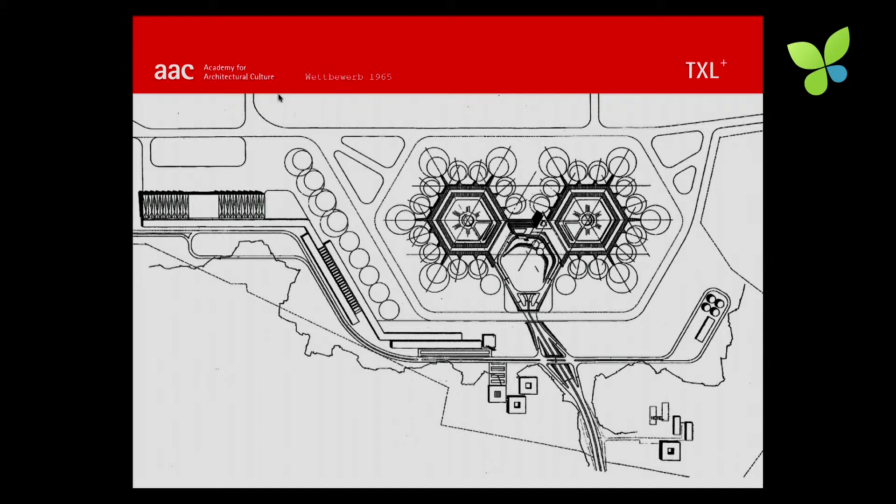So we were asked, as we also planned the new airport of Berlin, what should we do with this old building? That was the question from the city administration here in Berlin. Our idea was to build an energy plus city and to convert the terminal building into a startup center for new, innovative companies dealing with the energy problems of our world.

This is a conference where we deal with all these companies, but there's a problem in Germany: we have innovative companies everywhere, but no place where they can demonstrate their power and innovations. The idea was to have this building in the center of Berlin to gather all these powers in Germany, and then in a second step to build an energy plus city where people can live and work, where energy consumption from oil and gas is reduced to zero, and renewables support all these city structures.

The second step is that we want to create a carbon-free city district. And the third thing, which is very important, is that we want to create buildings which are completely recyclable. That's the main problem for architects and engineers in the next decades: 60% of waste all over the world is produced by buildings—by demolishing interior decorations, technical installations, and of course demolishing complete buildings. So we have to rethink our way of building houses in the future, and that's why we want to create recyclable buildings in this city.

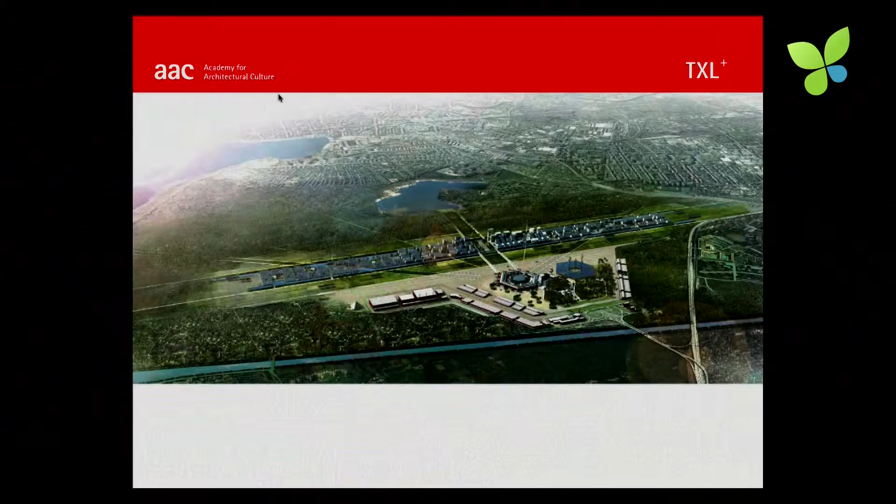If you think about the size of the airfield of Tegel, you see that we have 466 hectares. And if you compare this to Friedrichstadt with its 300 hectares, you see what kind of potential, just in terms of space, you have there.

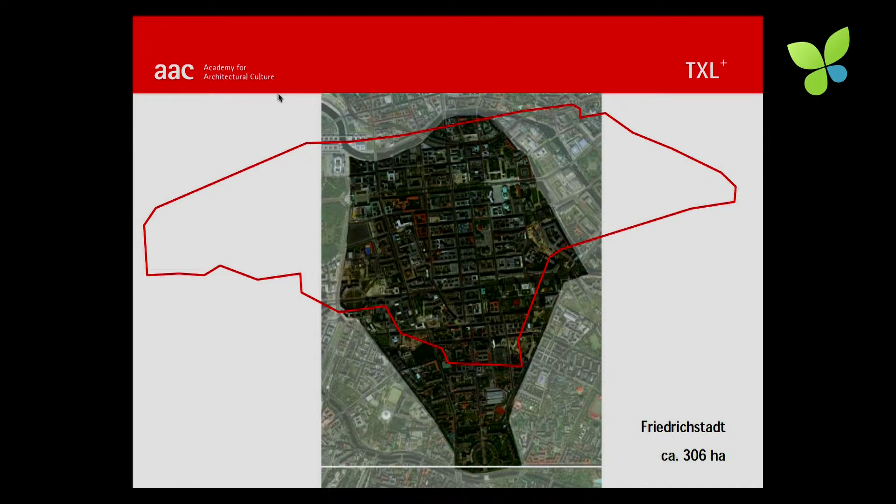This was the first sketch by Meinhard von Gerkan, more than two years ago in 2008, where he proposed to have the incubator in this terminal building, and then a geometrical relation to the airfield and the runways, with band-like city structures for living and working spaces.

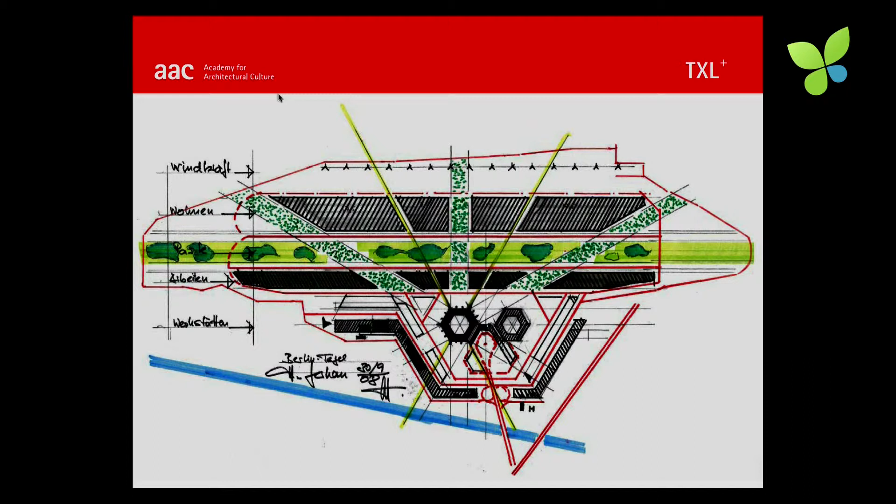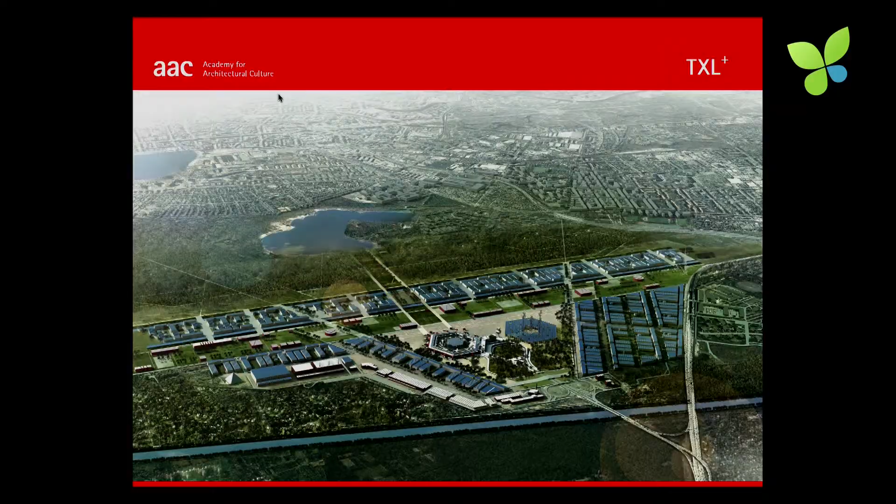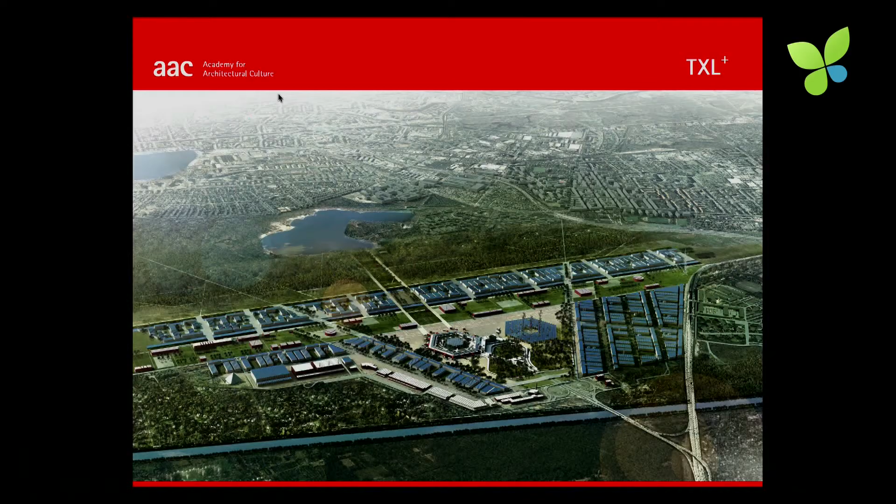The next picture shows the actual status quo of the master plan, which we developed together with the city administration, the Department of Urban Development here in Berlin. It still shows the airport and the terminal building in the center, together with a solar plant on this side—the second hexagon, which was always missing.

This second hexagon, this solar plant, together with windmills, supports the building structures—most of all the terminal building, but all the other building structures too, which have solar panels on the roof—so that we have a complete energy system reducing energy consumption from oil and gas in this city quarter.

We regret that during the process, the original idea of having residential functions together with office spaces and production in one band-like city was, for the time being, replaced by a technology park concept. But still the original concept is very clear and still visible.

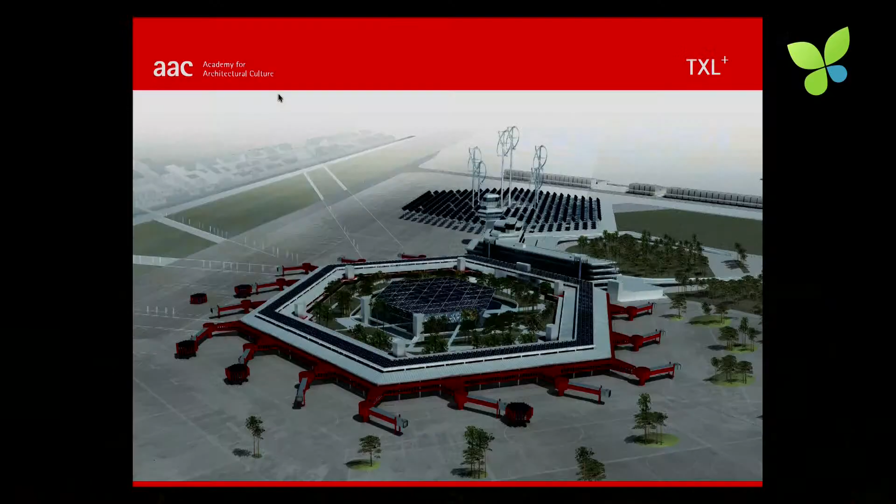Here you see a detail rendering of the terminal, this hexagon with solar panels on the roof. We want to show the change of ideas in such a way that we replace parking lots with a real green park in the center of this terminal, and on the other side you see this solar plant with windmills supporting the terminal building.

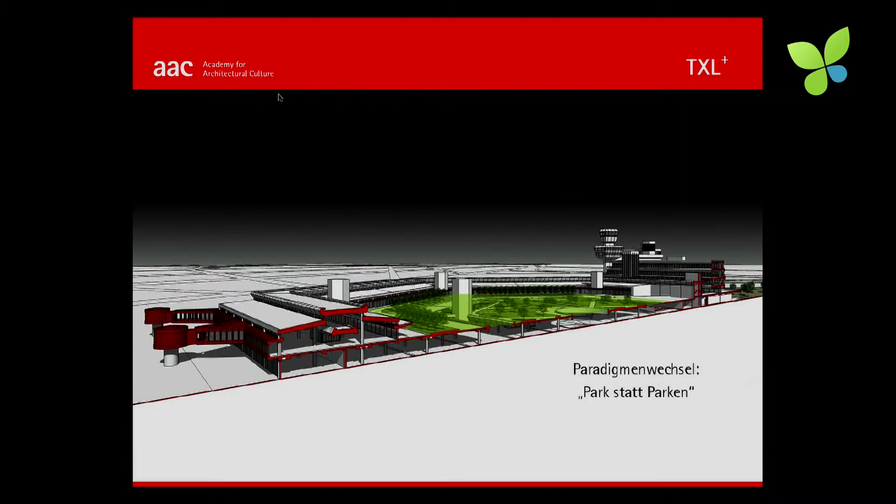In the center of our new building, we have an assembly hall where you can hold conferences and gather all these companies working and researching in this building. We want to create a circular tour through the world of green industry for delegations from all over the world.

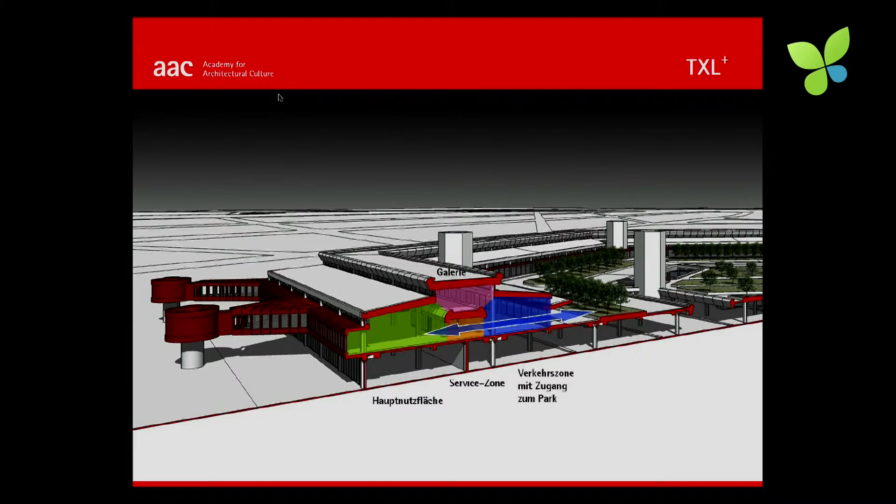The concept is about having three zones: one exhibition zone, one main functional zone, a gallery running around the building, and a circulation area open to the park. I think the most sustainable way of thinking about buildings is to keep them in use, not demolish them and produce waste, but think about a new function for such big buildings like the terminal building in Tegel.

We want to make advertisement, to show the ideas. From this summer on, we created the idea of a pavilion in the center of Tegel, where we want to display the ideas and the future of the airfield of Tegel. This idea will be realized in the beginning of July.

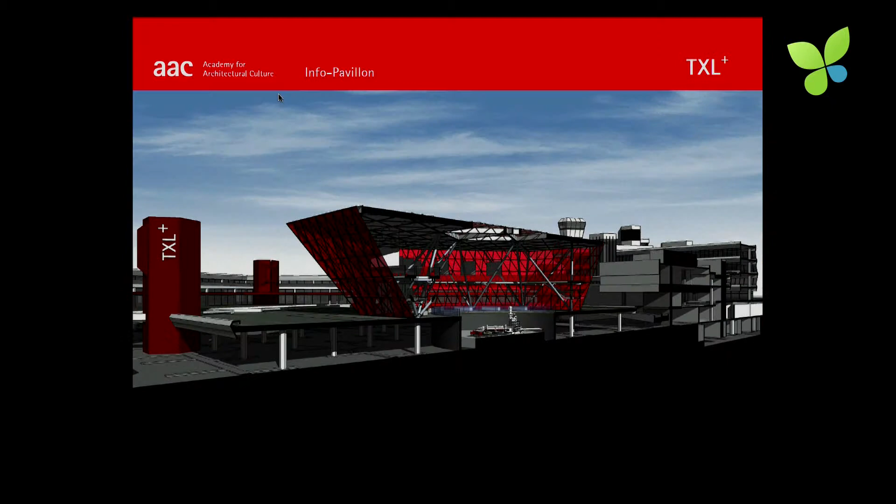This is an image of the info pavilion, which will first serve as an info pavilion for the new airport in Schönefeld, and then for the future development of the sustainable city in Tegel. Here is a section through this pavilion with a big model of the newly used terminal building and an exhibition of our ideas.

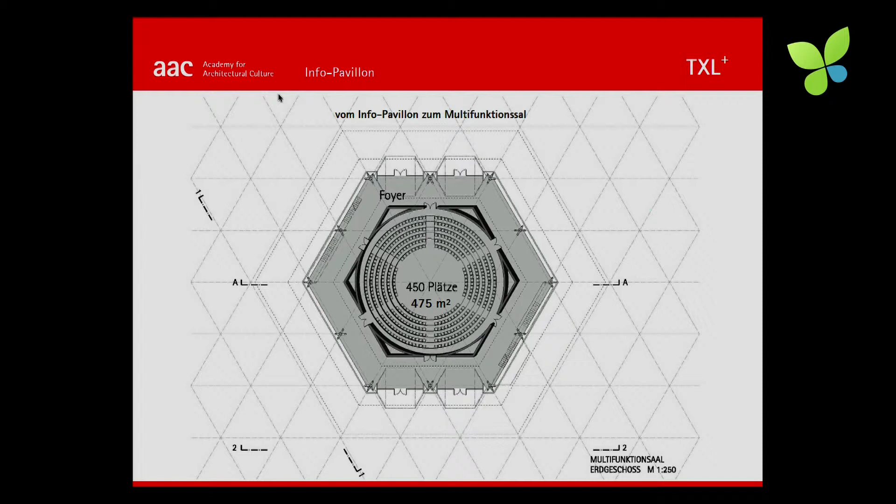Later on, this building structure could be used as an assembly hall with 450 people, and it's a very modern building. It still keeps this hexagon form, but uses solar panels and big glass facades, tilted so that the heat income is reduced to a minimum. We gather the water from the roof to run the restrooms and these kinds of things.

So this would be the first step. And then we developed four scenarios together with Jan Hess, who is not only an organizer but also contributed to our ideas. The first scenario for how to use the building is a green headquarter: we would have working spaces on the air side, a working gallery running through the whole building, and a circulation area with meeting areas on the land side.

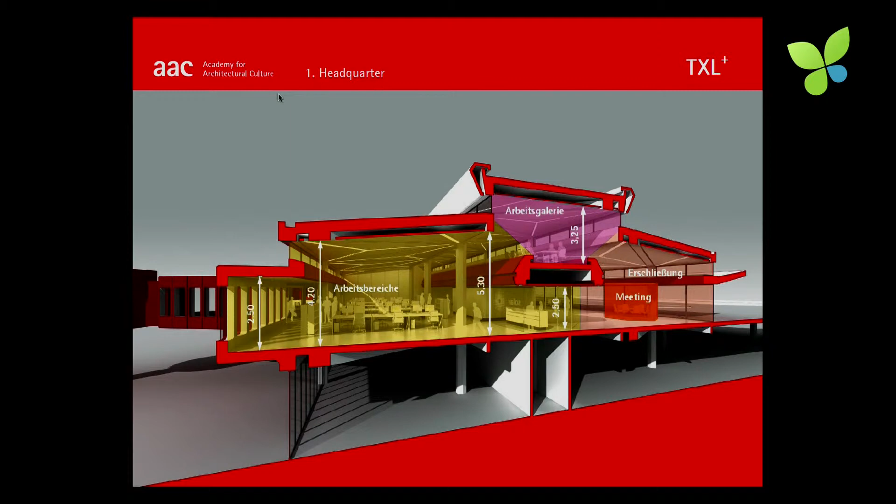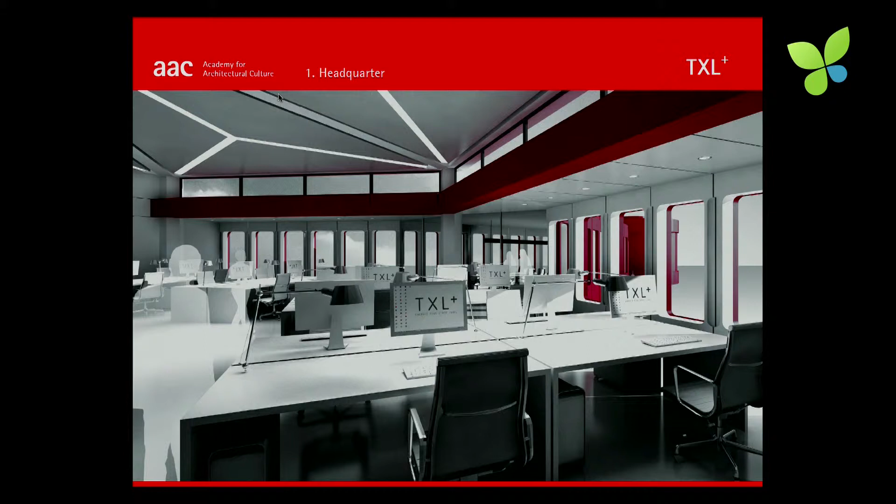If you know the building, you'll understand that we open up the check-in parts, the check-in counters, and create a connection between the air side and the land side. These spaces are nowadays used for baggage claims, but in future will be used for working and research spaces. All in all, we have 9,300 square meters just for working spaces, and these orange dots are meeting points. This is the gallery.

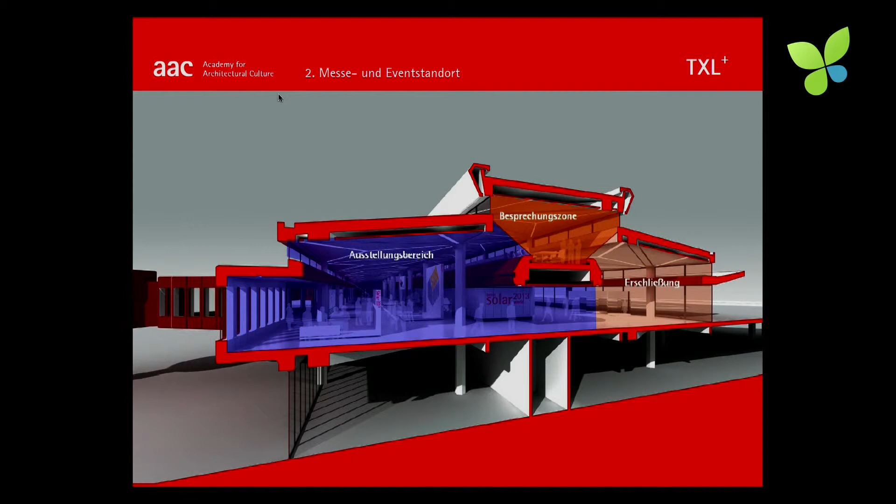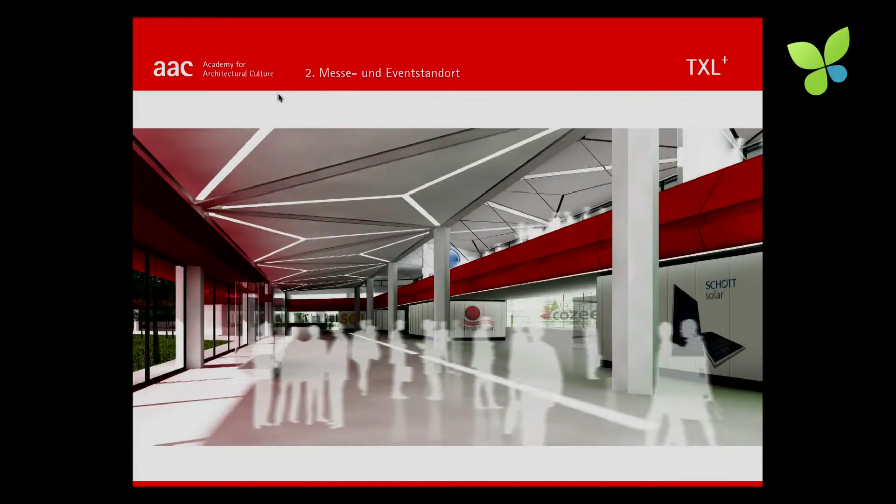The second idea was to create an event space and exhibition space out of Tegel, where we could hold conferences in future. This would be the exhibition area for future technologies, this would be the meeting area, and this would be the circulation area. We could hold trade fairs for solar and other technologies.

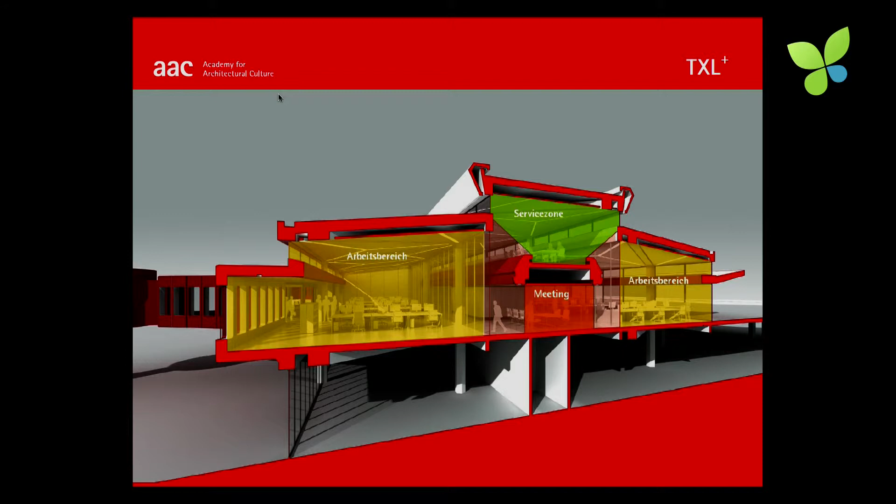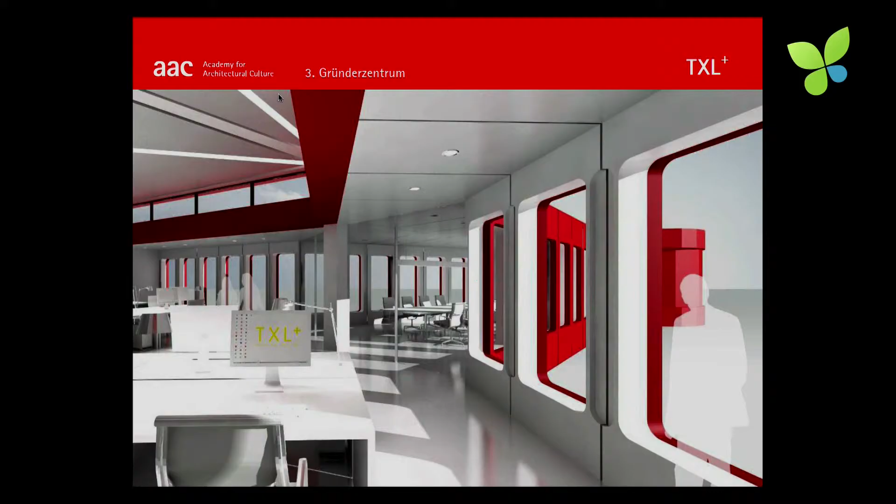The third idea is to create a center for startup companies in the field of new and innovative technologies. Again, we would use the air side for research areas, offices, meeting areas, and the other side for circulation. This idea is coming up to a very realistic scenario: the University of Applied Sciences in Wedding, Berlin is very interested in using this building in the future for their university, and we made a detailed analysis of how we could reach it.

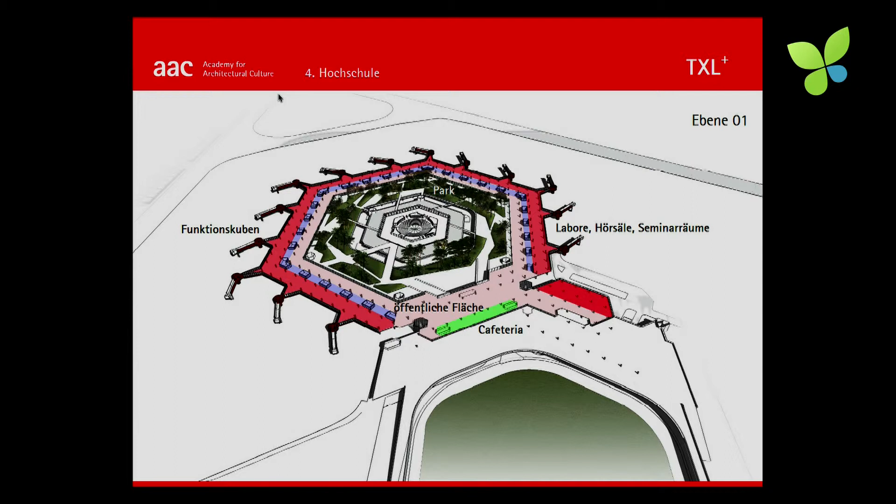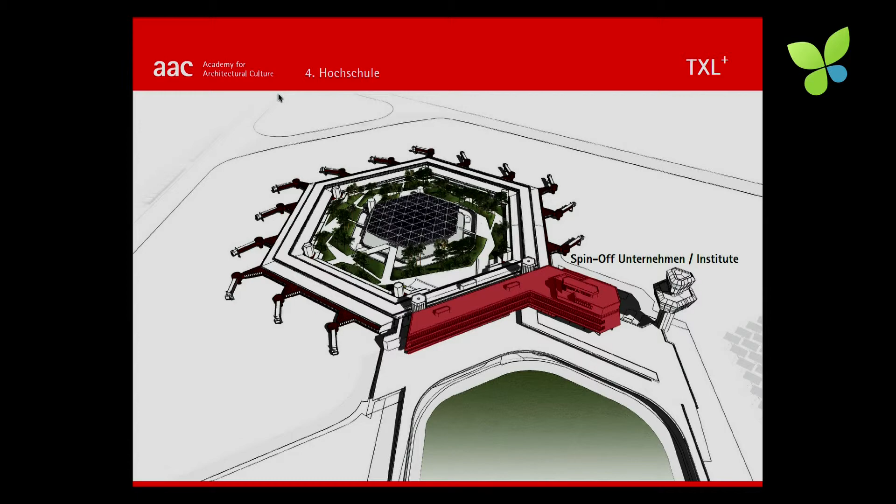The great idea of this scenario is that the building would still be in public use. Students and scientists would be there, and it would be a place where a technology center could be incubated in the middle of Tegel. We could keep the idea of the center pavilion as the auditorium maximum for this university, and use the administration buildings for startup companies. It would not be far from the main location of the Beuth Hochschule, the University of Applied Sciences, and the Technical University would be just 10 minutes away from the airport.

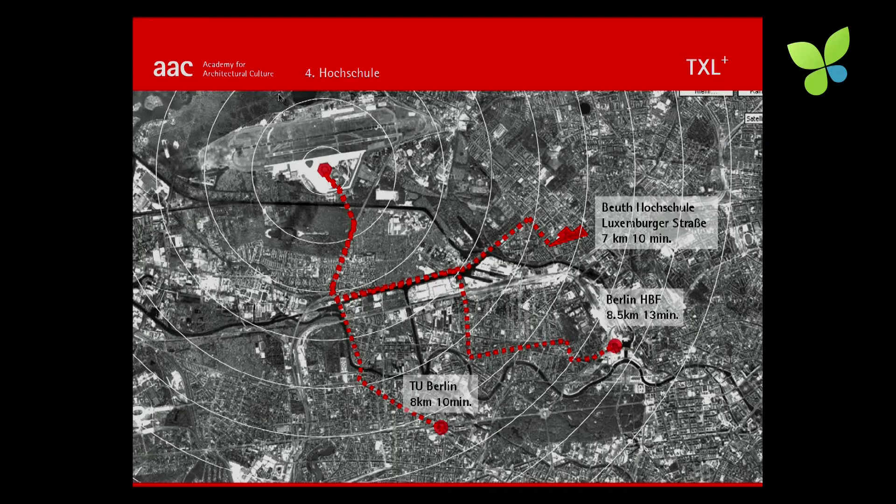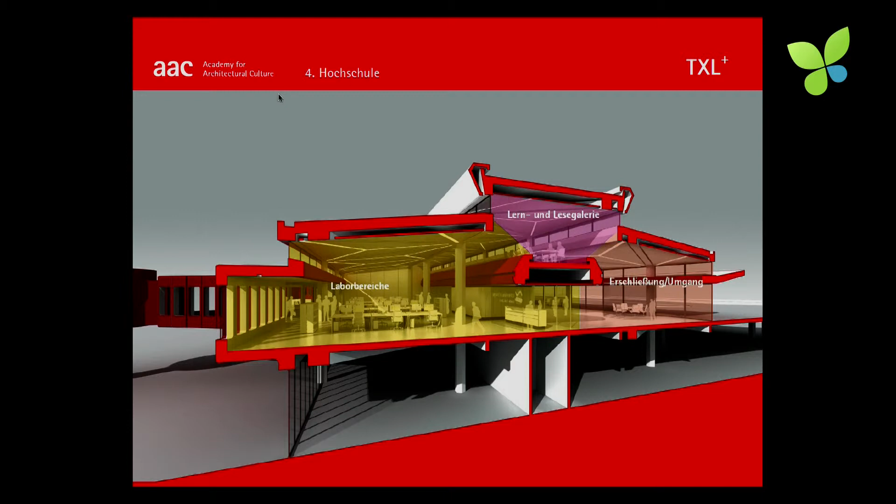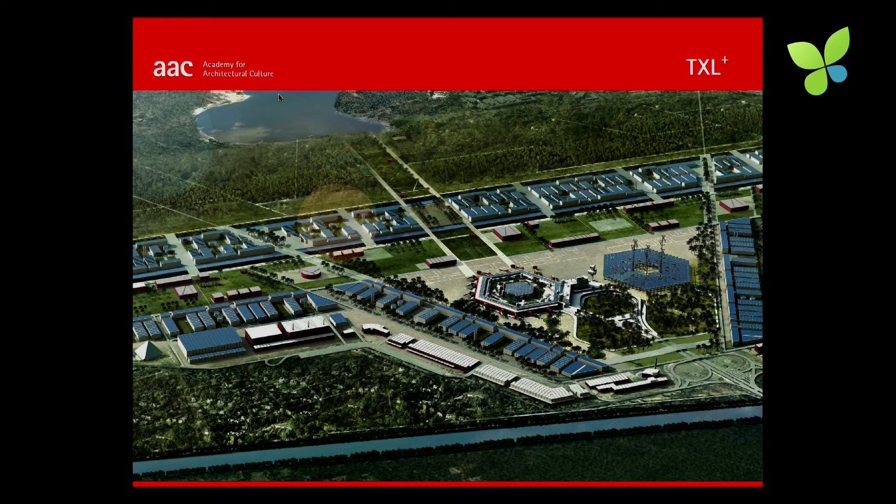This is the end of my speech, just to give you an idea of how we could use buildings in future, how we could develop the idea that older buildings can also be supported by solar energy and wind energy. For the end of my speech, I'll show you some pictures of the Eco-city in China, which we are developing right now.

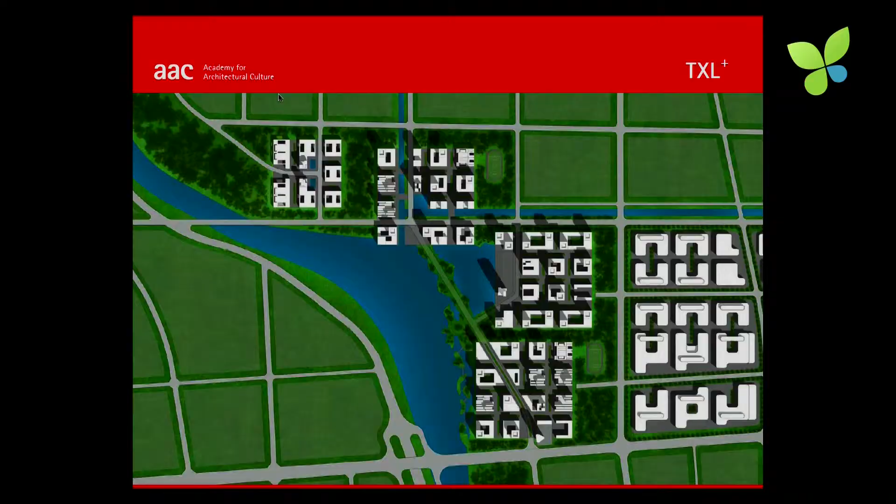This is the Eco-city in Qingdao. I was supposed to be in Qingdao today, but I prefer to stay here, and I will do this presentation later on. These are three dense clusters of urban development, and we want to take up these principles of zero energy, zero energy by gas and oil, zero carbon emission, and complete recyclable materials also in this city. So you see that the idea of eco-cities is going on all over the world. Thank you very much.